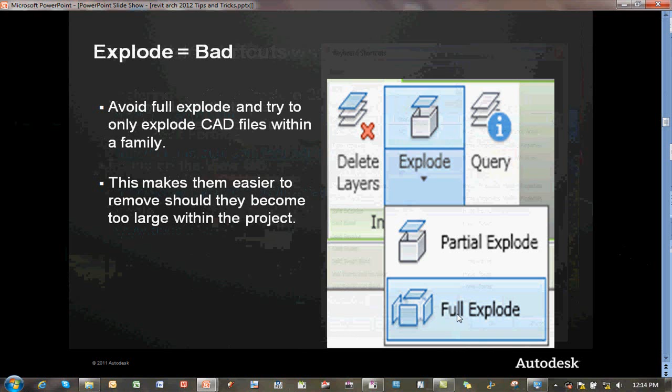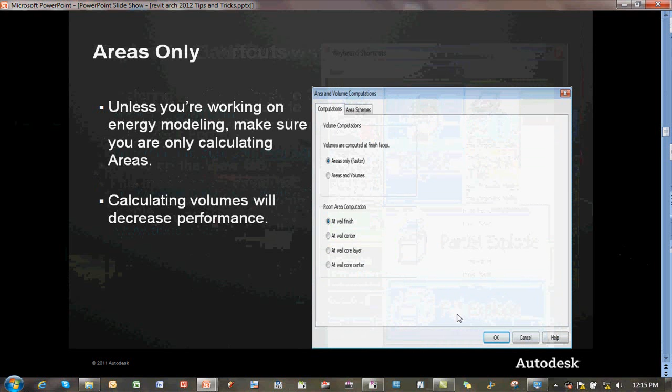Areas only - this is a big one, and a lot of people don't realize it, but there's a setting under the Rooms and Areas tab. I should probably switch over to Revit and show you guys some of these things. In fact, I think I will. Let's just get the basic sample project open here. So I'll switch back and forth between PowerPoint and Revit. I probably should have had it open already - would have saved 30 seconds or so.

Under the Room and Area tab, a lot of people miss this little pull-down. There's actually a little arrow at the bottom of the Room and Area tab, and you'll notice some other tabs, like Build, don't have it, but this one does. There's some more information there, and you can go to Area and Volume Computations. By default, Areas Only is on.

When we start wanting to get into doing any kind of energy analysis and understanding what the volumes are, we check on Areas and Volumes. I wish there was a way in Revit to quickly toggle this on and off project-wide, but this is how you do it for now. When you turn Areas and Volumes on, every move I make where there's a room inside of a Revit model, if I move a wall, it wants to recalculate the area and display it in a schedule, and it also wants to do the volume. So it's adding another calculated value to what Revit has to think about.

So if you're not doing anything with volumes at that time, and you're not ready to go out to GBXML to do energy analysis, go into the area and volume computation area and turn on Areas Only. It actually tells you it's faster. If your drawings seem slow, that's one thing to check. Make sure you're only calculating areas and turn on volumes only when you need them. There are other options here for how you calculate area, but realize these do not affect the volume calculation. The volume is always at the interior surface of the walls, floor, roof, etc.

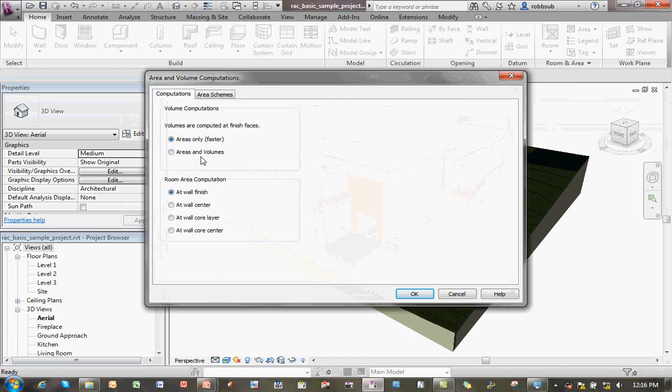Okay, back to PowerPoint. Alright, managing view depth.

I'm probably really guilty of this. Every time you cut a section, dropping a section mark inside of Revit, it wants to go out to the extent of the geometry as indicated by this dashed line. What that's going to do is when I open that view, it's going to show everything from that cut line all the way out, in this case beyond the end of the building. So it's regenerating a lot of geometry. If there's walls and things in the way, like this wall right here, I can't even see any of this furniture beyond, but Revit's having to think about that. It's basically saying, okay, there's a table back there beyond that wall, but I can't see it, so don't display it in the view.

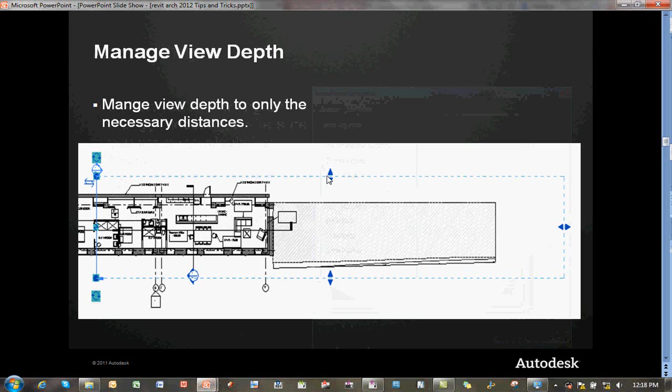So minimize those view depths. If you don't need that section to look all the way through the building, grab the last grip on the end, stretch it back so it makes a more appropriate section cut. And be careful about the sides as well - how far across the building do you want that crop region to be? Managing view depths is a great tip. I tend now to try to make them more or less little slivers. What's important about that section cut? What do we want to see, what do we want to convey in our construction documentation set? Like I said, I'm really guilty of this - I used to stretch them all the way out the building. So just be aware of that.

Purge, just like in AutoCAD. Did you guys have a lisp routine set up for super purge or something at some point? In AutoCAD, if you ran purge once, then ran it again and again, it kept finding stuff over and over. Purge does some similar things inside of Revit.

Basically it gets rid of all the stuff that might be loaded into the project that you're not using. In 2012, it's actually in a different list, but there's a materials purge now too, so you can get rid of all the materials you may not happen to be using at that time. Make sure you regularly purge unused elements. Be aware that you can expand each category - there are little check boxes - but if I just hit purge, check all, and OK, it will get rid of 252 objects right now.

So use this list accordingly. Go through it, expand what you need to see, make sure you set it up the way you want, and only purge out the stuff that you're sure you're not going to use. That helps keep file size small, helps make saves better, helps make save to central better, etc.

Errors and warnings. When I go around and talk to customers, I do a lot of troubleshooting. An office will call me in saying we're having problems with our models, something's not working right, it's slow, kind of the normal stuff. One of the first things I do is go to the errors and warnings dialog box. How many of you notice that little yellow warning dialog box that pops up in the corner of Revit?

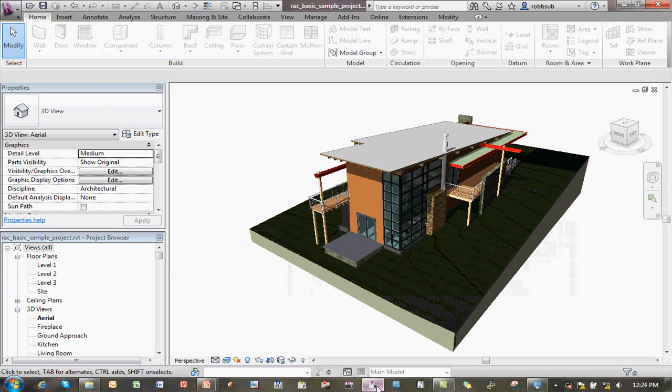And like I said, you can get into a lot more complex stuff. Let's go over to Revit real quick. So this could be anything that has a dimension on it. Oh, there's no dimension—see, this is what happens when you don't use your own Revit file. Let's put some dimensions in it here real quickly. Oops, Home tab. No. See? Now I'm lost. There we go. It takes a while sometimes.

Oh, and it's in metric too.

So any one of these things that we click on, I can simply type equals on a dimension line, put in some dimension, 6,000 minus some other. I'm not going to do it right now because I'll probably blow up this building. But any one of those things, those little dialog boxes, can be a calculated value for you.

Okay? Why do we still use Imperial, by the way? When I go do stuff, I was at the Revit Technology Conference in Australia last year. All my data sets are Imperial. And I was down there, they're going, 256 of an inch? What? Silly Americans. These silly Americans, pretty much, yeah, exactly.

All right, so all of those lines can be a calculator for you. We'll show you some of the more complex formulas you can use later. Those can be things like the cosine of an angle, minus, square root, logarithmic functions. Really anything you want can be typed in those as well. The example in the PowerPoint was actually inside of a dialog box for a dimension.

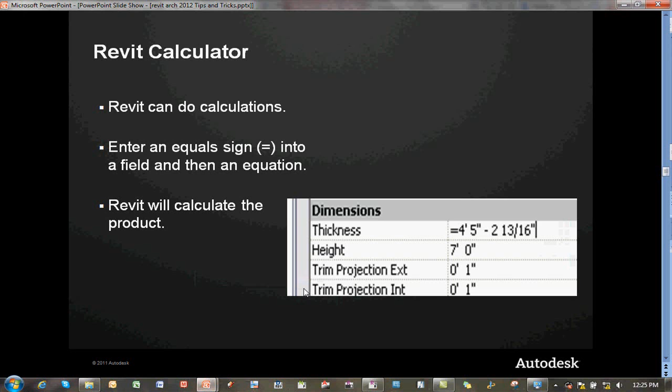2D versus 3D. This is huge. Actually, this is another example I had on my machine, but I'll tell you about it.

People in Revit tend to get enamored by the modeling side of it, right? Oh, that's so cool, I'm going to model every single little crevice of the door jamb, right? And manufacturers are actually really guilty of this, and this is the example I was going to use.

So if you go out to Seek, which is our website for gathering content together, a lot of the content there is getting a lot better, but a lot of it still needs improvement. In fact, we just launched some new things on Seek. Let me see if I can pull that up here real quick. Seek.autodesk.com. Oops. Typing is also not one of my strong points. Should have paid more attention in high school.

Anyway, while that pulls up, there's actually a rating system now on the Seek objects. So if the manufacturer has complied with about 9 or 10 different techniques in Revit, you'll see a little icon. Like, are they including a shared parameter file? That will be there as an icon. Do they have the materials included with the file? So on and so forth. So when you start seeing that rating system, those are generally better families than some of the ones in the past.

So what ends up happening is people start modeling all of this little intricate detail, and the reason I use door frames or window frames is generally we can't see that stuff. Let's take a door frame, for example. If you're going to look at that at an eighth-scale elevation or interior elevation, just the outside lines is fine. I don't need to see all of the aluminum extrusion or the steel extrusion inside of the door frame. This elevator is a good example. So this can actually be drawn as a 2D piece of geometry embedded inside of the family. And when we cut through the elevator, we actually see all of this stuff. But in the Revit model, we might only just see the door as a 3D piece of geometry.

So minimize that. Another one—and I was guilty of this too—is toilets, right? We go, oh, that's a really cool 3D toilet in the library. Actually, it's not. I hate the 3D toilet in the library inside of Revit. I think almost everybody makes their own.

But don't put 3D toilets in all of your rooms, right? If you need to do a rendering of the bathroom—how many people have done renderings of bathrooms? A couple. All right, so then use the 3D toilet in one room.

Otherwise, just use a 2D representation of it. You can make a family that's a plan view, a front view, and side views as one thing, as 2D geometry. So when you place it in your project, you can actually see all of those views. When I look at an interior elevation, there's the front of the toilet. When I look at it in plan, I can dimension to it. If I use 3D geometry, especially because toilets are so curved and they've got the trap below them and all of that good stuff, right?

There's a lot of geometry going on there. So use 2D where appropriate, use 3D where you need to see it. Okay, does that make sense? All right.

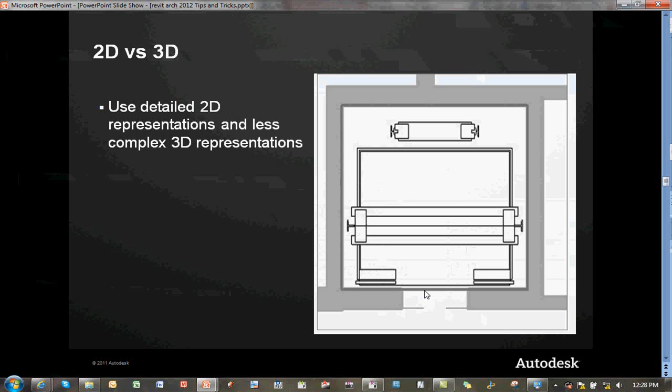How are we doing on time? I got about half an hour.

Graphic overrides. This particular tip is talking about using graphic overrides to quickly indicate poche during design. So one thing we like to do as architects—actually, I think poche as a term isn't even a real word, right? It kind of got invented by architects. Poche in that wall—it used to come from our drafting days, our hand drafting days.

So we still like to use poche to show walls and other objects with kind of a solid look. But if we set that in object styles, it applies to every single view throughout the entire project, right? So just use view-specific graphic overrides. You can actually right-click and say override element in view. Pick something like walls, set the cut pattern to maybe a diagonal hatch pattern or a solid hatch pattern.

And now only that one view is the poche. Maybe that's the one that goes in the schematic design set, and then later on you can have another view that shows more detail of the wall. It's a much faster way to work.

So now, don't be worried about that. Cut a bunch of sections, use what you need in your construction documentation set, make a view that's for schematic design, make another view that's more of your construction documentation view, make another for design development. You can always just delete those views later if you don't need them. They don't really add that much weight to the project—it's just redisplaying geometry that's already there.

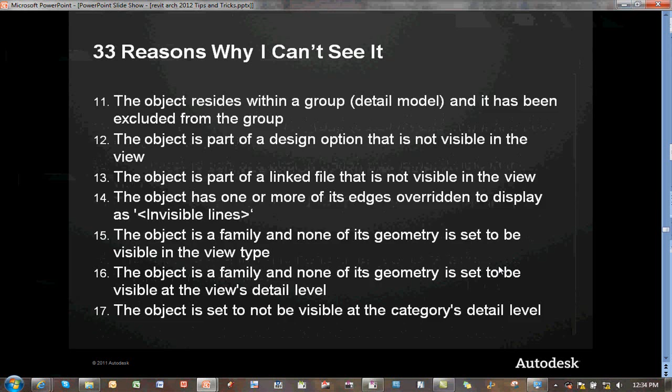17, we're a little over halfway there. Object is set not to be visible at the category's detail level - that's the same thing again. We'll fly through these. Let me see if we can get to a couple others that are important.

Discipline - hey, there's one. So we're talking MEP, structure, and architecture. We get that a lot in the forums: how come I can't see something? I'm in Revit Structure, how come I can't see the walls? Well, because the discipline isn't set to coordination. In the coordination view, a structural engineer can see the architectural walls and the structural walls. That's a question we get quite often.

View filters applied to a view is something else that can affect its visibility. Element overrides set to the background color - there's another good one. So you go and you set an object override to white.

How many people use a black screen in Revit in here? Oh, I see one hand, good. Again, that comes from old AutoCAD days. I have users that, when they first start Revit, set the background color to black and adjust their object style to try to mimic AutoCAD layers - like their walls are red and their dimensions are yellow, trying to mimic the colors from AutoCAD. Don't do that - that's a good tip.

Category override set to the background color. Object style is set to the background color. So realize object styles are global. They affect the entire project.

You've got view-specific overrides that affect the object of that particular type in the view, and then you've got element-level overrides of every view. These are all things users ask for, and Autodesk, the Revit development team gave you, but they're all things that make things more complicated. Users said, we want more control of how everything looks in a view. Okay, we'll do that, but just realize it came with a lot of complexity, so be careful with how you use these things. We're almost done with this part.

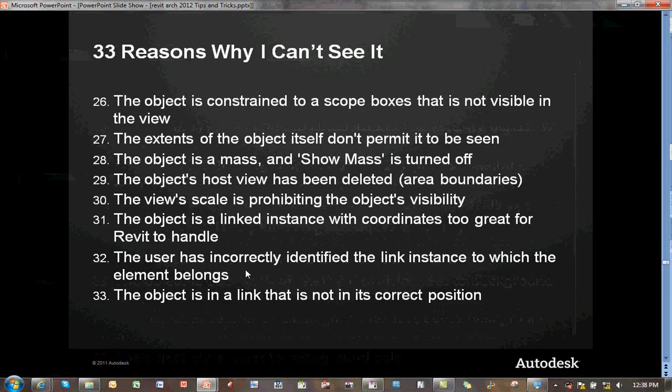This will be something you guys can have as a document to print out. Next time one of your users comes to you and says, I can't see whatever, you can hand them the list and go down, check these off. Any questions on that so far? None? All right, I'm either doing really well or you guys are thoroughly bored. Hopefully the first.

Easy section boxes. Has anybody made a section box view in Revit? A few? They can be a little bit difficult sometimes, so I have a quick set of instructions here to do it, and I'll show you how to do it and what the difficulty is in making one of these section boxes.

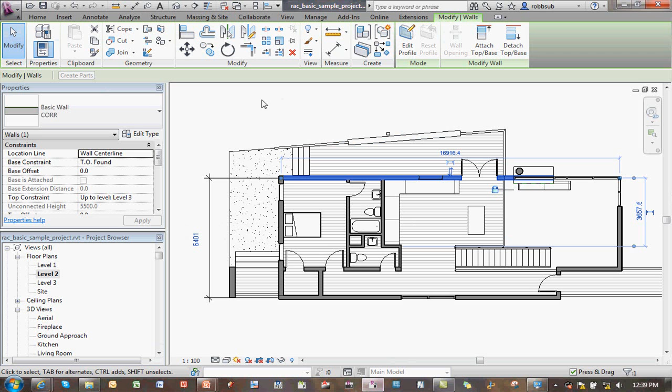So, normal workflow here, even though this isn't my model, we'll try it. Create a camera view. I'm just going to stand outside the building and look this way, and it's going to create this overall view. I'm going to grab the steering wheel.

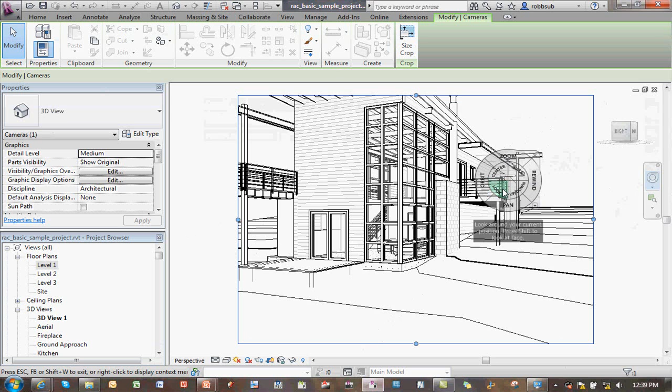How many people like the steering wheel? Like 4? No, it's actually really useful. When I was in practice I used this a lot in presentations because you can start doing things like moving around. A lot of people don't know that when you're using the look tool, you can use the arrow keys at the same time, so you can walk around like a video game, combining those things into one. You have your walk speed turned way down though, huh? Probably, because mine is like, whoo, zoom all the way through the building.

We should add that to the list: you've zoomed past your building in a perspective view.

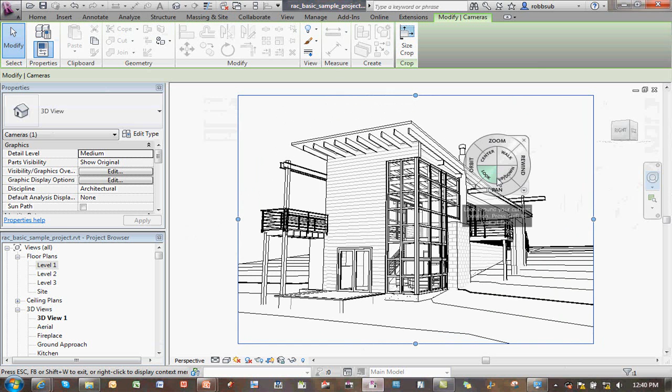All right, so get your view set up. I happen to like using the steering wheel to do that. You can also use a bunch of keyboard shortcuts, like Shift and the middle mouse button, which allows you to orbit and spin around. So there are shortcuts without using the wheel.

Well, then you go over here to Properties, and you turn on your 3D section box because maybe you want to do some kind of cool cut section of this thing. And there it is, and you go, oh, that's cool.

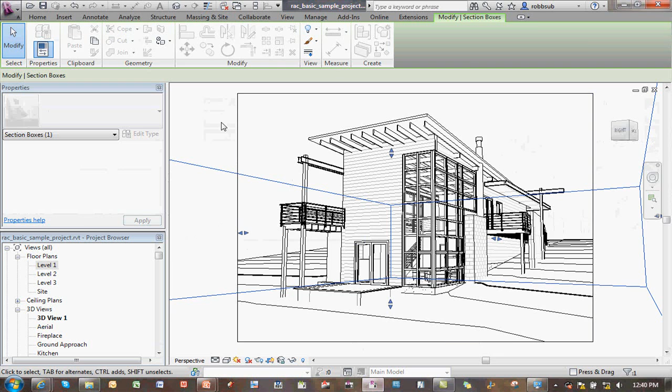Well, I want to pull this thing in front, back, and cut off the front of the building, but I can't get to the section box because, as you can see, it's actually kind of way out here in space. You can zoom way back, and eventually you might get to it and see how kind of crazy distorted it's getting. It's just way out there.

So much easier way to do this. Let's throw a little color in here too, just so we can see it. Keyboard shortcut for color, SD by default. If I use keyboard shortcuts, I try to announce what they are.

Now we're going to use the view cube. How many people like the view cube? All right, a lot more.

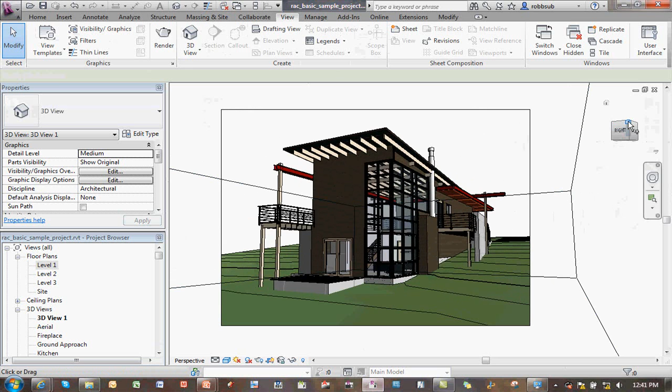Go ahead and toggle that to a view that looks like this. Oh wait, you just screwed up your perspective view. Well, yeah, kind of, but now at least you can get to the section box. Oops, that's the other tricky thing. You have to kind of click right in between the arrows to do section boxes. We'll zoom in a little bit more.

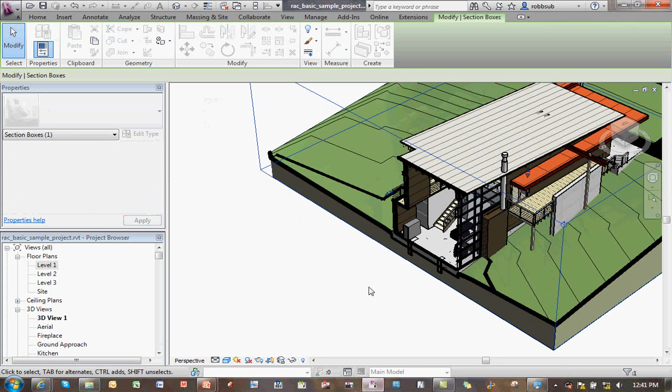Maybe I shouldn't have put color on, it makes the arrows hard to see. So then maybe we want to do our section like that. Maybe we want to pull this one into the side. Use the view cube and go top down, right? And now you can kind of see more or less where you're at. You notice that we're still in a perspective view even though it really doesn't look like it, right?

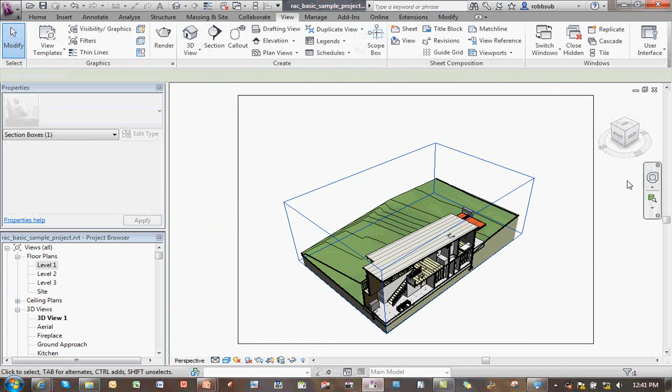Okay, so now, once you get the section box cut the way you want it to, go back to your steering wheel. Yes, you'll enjoy using it at some point. Go to this little guy called the rewind tool. Click rewind and rewind back through the film strip until you get to your original camera view that you wanted. So see how I did all the zooming around. Keep going, and we're almost there, and stop.

All right, so there's the same exact camera I used in the first place with a section box cut the way I wanted it to, looking at what I wanted to look at. So the rewind tool doesn't rewind, it's not an undo, it just takes the view and sets it back to what it was. And as you saw, by using that, I can actually go back to kind of any of the positions all along as I was zooming off into space there.

Now, do not, big tip, go over here and go, okay, I'm done with my section box, let's just go ahead and uncheck it. Right? What happens if I do? Section box disappears, all my edits are gone. Let's go ahead and do it. Told you not to. Apply that, gone, everything's back.

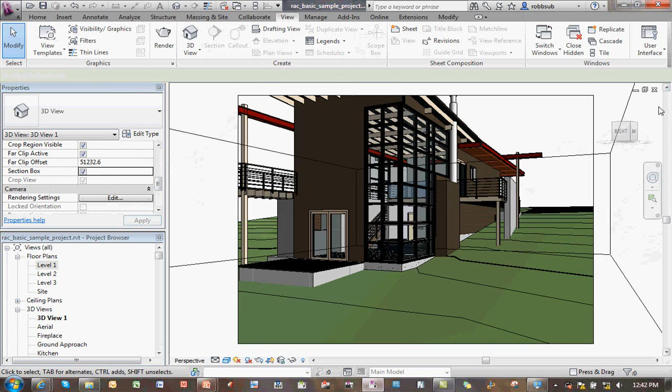Oh, no, that's not what I want to do. Let's turn it back on. Crap. Reset it, go back here, pull everything back in again. I'll try to do it quickly. Something like that, and rewind. You'll notice now my rewind has been reset, right?

It's only a couple things, it's not the whole big thing. So it's not infinitely going to keep a film strip, because can you imagine you did all of the stuff in a view and you had to rewind back for 8 hours worth of work?

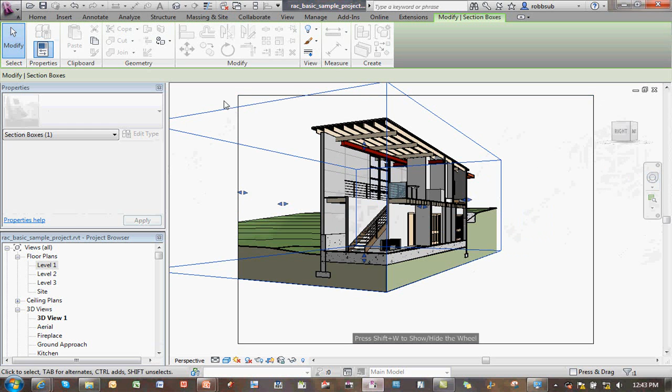So what you do: highlight it, right click, hide in view, element, and now you don't see it anymore. Or use a keyboard shortcut, see if yours is set up, VH is typically view, hide, element, basically hide an element in the view, and it does the same thing.

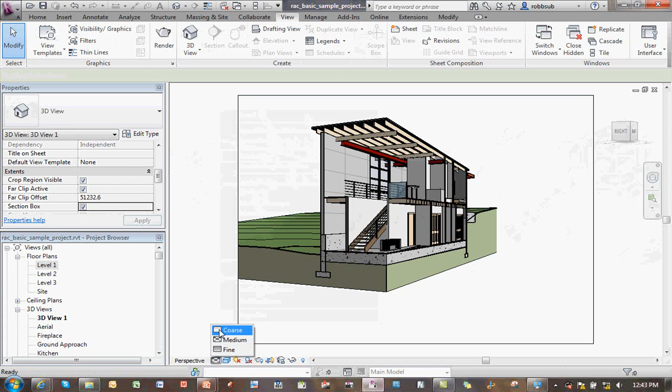So now you've got a 3D section box. Then a lot of people with section boxes ask about the poche that ends up showing up. And notice that I don't have that poche on right now. It's because the poche only shows up in a coarse level of detail. So when I turn it on, you start getting everything that's cut is actually black, and who knows how to change that? Anybody? How do you change it? You raise your hand, I got to put you on the spot.

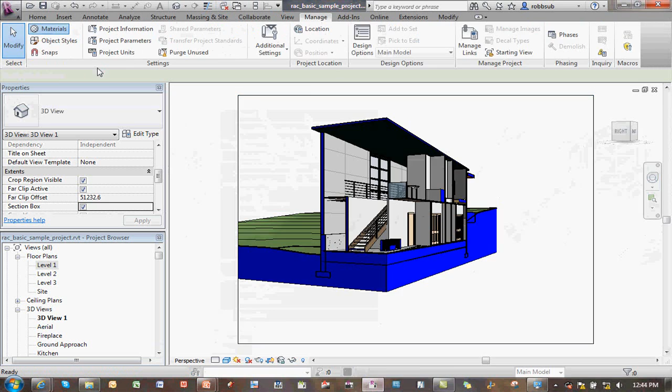You could do it in view overrides. It's also a material. If you go to your materials dialog box, go to Manage, Materials, and go down the list, there's actually a material called poche. Right there, notice it's blue. You can set it to a real material, or just change the color here. Maybe we want our poche to be red, apply that, and now the poche is red instead. Again, it's part of the 33 steps.

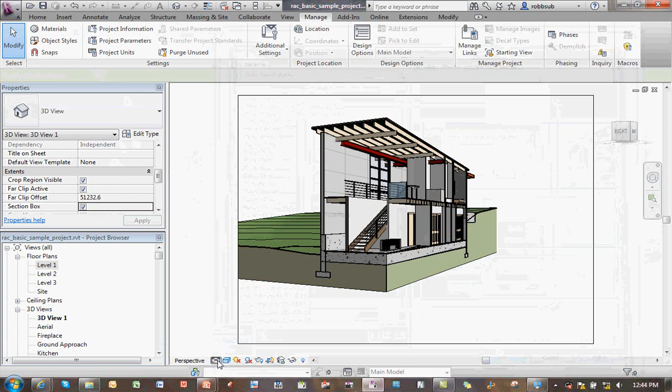What is shown in medium and what is shown in coarse are two different things. So if visibility isn't happening the way you want it to, play around with the coarse, medium, and fine level of detail settings. Can you do that, the coarse poche, in a hidden line view? Yes.

Oh yeah, so you want to talk to your guys? Yes. Talk about being put on the spot. Yeah, it used to show up right here, didn't it?

Huh, yeah. Every once in a while developers do something really cool, and we have all this regression testing. Have you guys heard of a regression farm? I had no idea either until I joined Autodesk, until one of the guys in Waltham, Massachusetts took me into a room loaded with server after server after server. He said, this is the regression farm. I said, okay, what is that? It's actually Revit's code. Do you guys know a new version of Revit is created every hour of every day? That's where your build numbers come from, and your builds have the date and the actual hour in 24-hour time format. Every single hour of every day is a new build of Revit.

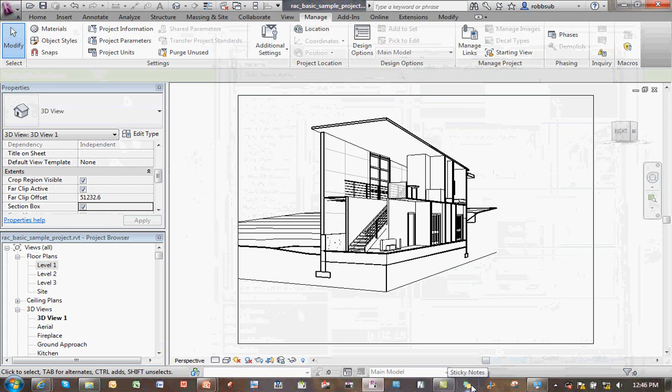All right, let's see here. 15 more minutes, I think we're doing all right. Uh-oh. Let's see, where was I? About right there. I don't know how that happened, I must have hit escape or something, huh? All right, so there's a set of instructions on how to do that.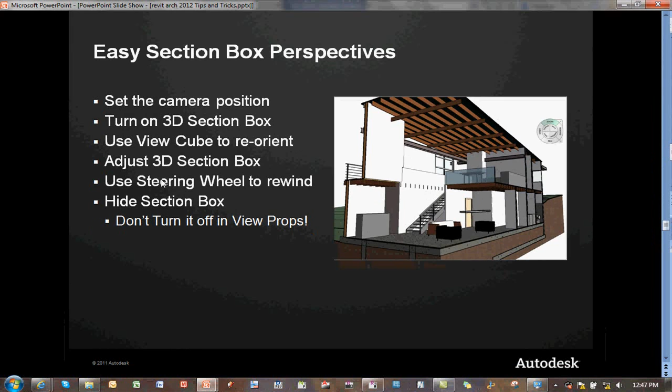All right, normalized curve parameter. Who's heard of this? A couple? No? Anybody done any of the conceptual modeling, any of the massing stuff yet? This is actually a term that comes out of that.

For those used to building loadable families, a door, a window, a light, a piece of furniture, you're used to a certain technique: build a skeleton, a framework of reference planes and reference lines, tie your parameters to those reference lines, flex everything. That's one of our big things, always flex your geometry in the family editor and then hang your geometry on it. Inside of that we've got these cool things for doing equality constraints.

We've all used an equality constraint, I'm sure, inside of a family. It says we always want this door to be centered around this origin point, or something to that effect. So there are certain techniques we use in loadable families that start to change a little bit when we get into the conceptual modeling environment. What I end up finding is a lot of people take that same technique into conceptual modeling, apply those same techniques, and things start falling apart and they don't know why.

I was hoping to explain that and start inspiring you to try some of these new things. This normalized curve parameter is one of the values available under measurement type, which can be set to several different types: non-normalized curve parameter, segment length, normalized segment length, chord length, and angle. Let me show you what these are.

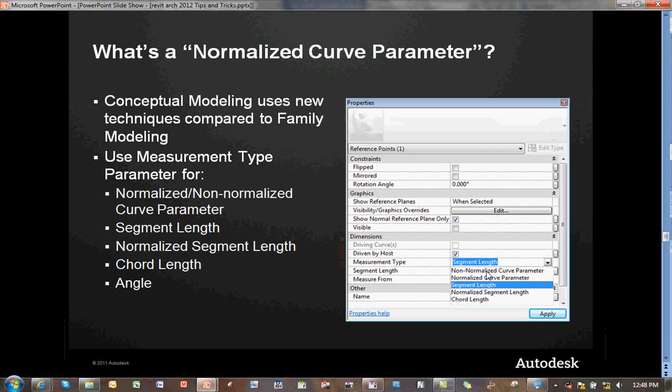Let's go back to Revit. We'll close out of the modern house. It's funny, one of the internal guys, a guy named Greg Demchak, who goes by the name Frame. So when you walk into Waltham, you say, 'Is Frame here?' and Greg comes out. If you call for Greg, he has no idea what you're talking about. He actually made that modern house file some time ago, and it's still something we use. There's actually a design for a real project, a real house he wanted to do at some point. So a little history on that guy.

So we're going to do a new conceptual mass, pick the mass template. For those that haven't gotten into this environment, the first thing you notice is that it looks a little different right away. You're in a 3D environment, with this cool 3D level line. Wish we had those on a project, right? In a normal project environment. Maybe someday we'll get those.

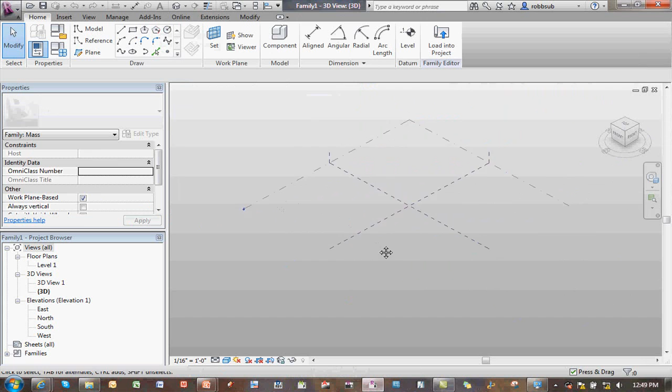You get a couple of reference planes going in here. I'm just going to draw a real simple piece of geometry, just a line, and it doesn't even matter where it goes. The idea with conceptual modeling is that you can host geometry on other parts of geometry. So what we're going to do is use this line to set a constraint, which could be an equality constraint using a point.

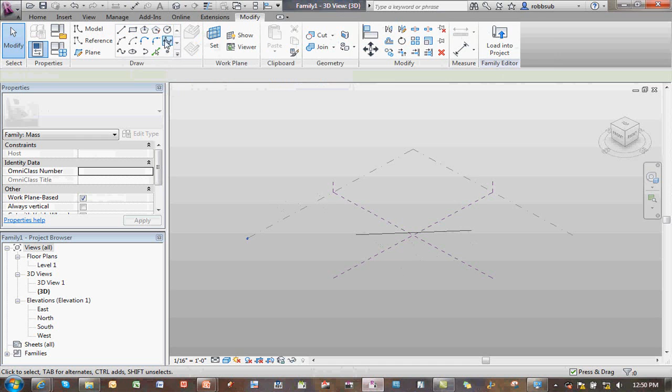It's a relatively new tool available in the conceptual modeling environment. You've got lines and boxes and circles and splines and things, but you also have this other tool called a point. When you come down over your drawing surface and place this point on another piece of geometry, you'll notice it goes from a large dot, and as soon as you hit the geometry, it highlights and becomes a small dot. We'll go ahead and place that right on there. That dot is now hosted on that line automatically.

You can see that if you pick the dot, grab it with your mouse, and move it along, it slides along that rail. So this is about using a different kind of technique inside the massing editor to create geometry that functions as a rail, or a set of controlling geometry that we can do other things with.

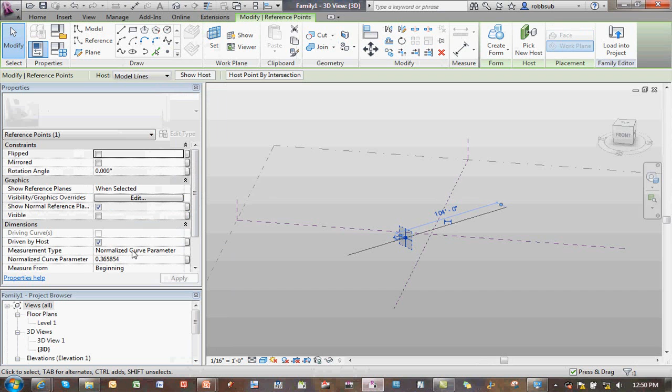So now this parameter called measurement type comes from this point. When I select that one point, let's make the properties dialog box a little bigger so we can see this. You'll notice by default it's called the normalized curve parameter. Now you also have segment length and normalized segment length. So what's the difference between a curve parameter and a segment length parameter?

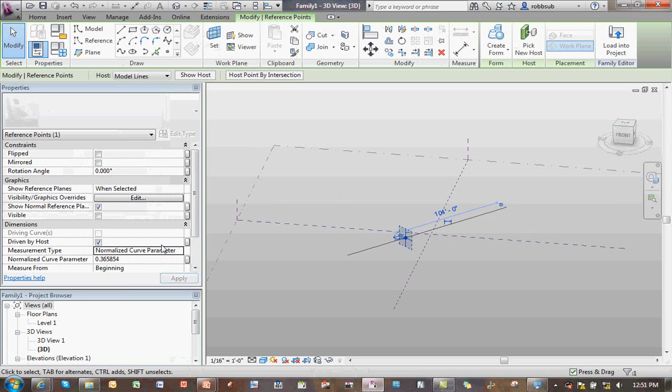Anybody know? They really do the same thing, except a straight line in geometric terms, as far as computer language goes, is actually a curve—it just happens to be straight. A segment is a segment; it has to be straight, it can't be a curve. So that's the difference there. In some cases these can be used interchangeably between normalized curve parameter and normalized segment length. They really do the same thing until you start getting into geometry.

It actually is a true curve, or something that might need to become curved later on, because when you're doing this stuff, you can make a line that appears straight at some times and then actually morphs into a curve using the conceptual modeling tools. So we're going to use normalized segment length.

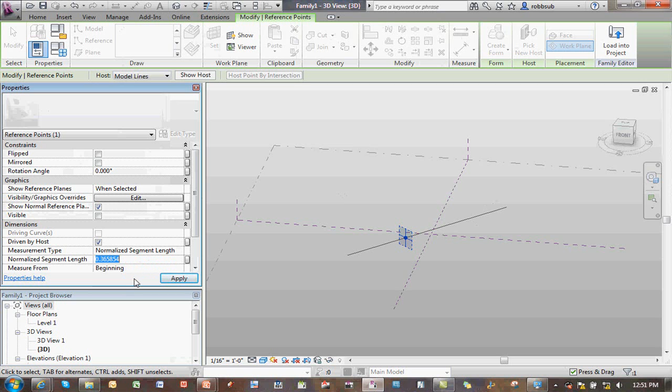Right below that is the normalized segment length value, and right now it's some crazy decimal, 0.365854. In the normal family editor environment, if you wanted this dot to be right in the middle of that line always, most people would go up to the dimension tool, set a work plane, tab into this point, maybe to this point—oops, see, I'm off my work plane. You have to set it over here, or set it to this particular line.

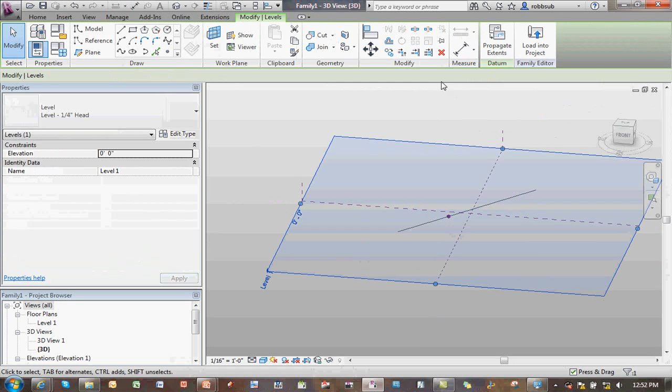Oh, I got to turn that into a reference line.

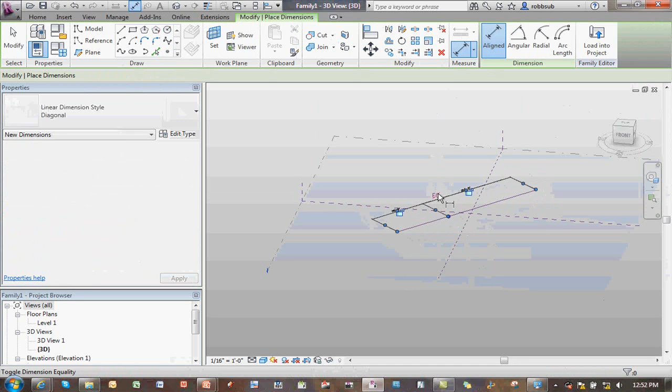Okay, and we'll set our work plane to one of these, and we'll dimension along that now, to endpoint into that dot, and then I might go toggle equality. So now that dot is at the middle of the line, and depending on what I do to this, it will always stay at the middle of that line.

This will start to fall apart. This is kind of a normal technique that if you're used to building normal families, that you'll try, so you try it in the conceptual massing environment. What happens though is if you come in here and tab into this endpoint, if I can get to it again...

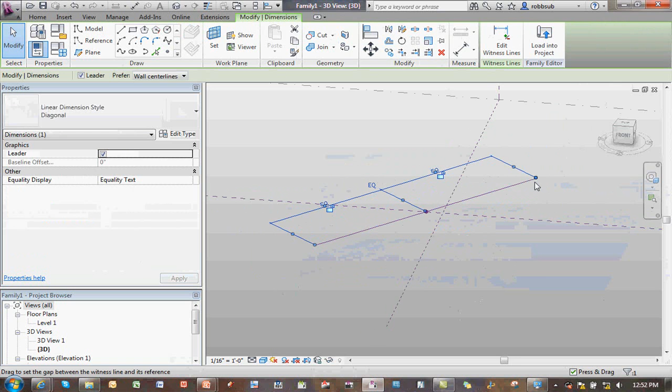If I start changing this thing in a Z direction, which I'm not able to do right now, but sometimes when you create conceptual massing, things start getting out of plane. Dimensions like to be planar, right? They always like to reside on a work plane. What will end up happening is if this thing starts to tweak and get out of plane, especially if you're dealing with curtain wall systems, this equality constraint will fall apart because it won't be able to stay snapped to the endpoints of the lines any longer.

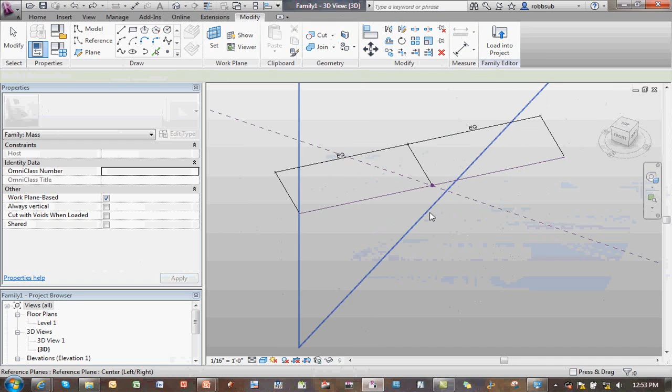So I'm going to undo a couple times. What we do instead in this kind of family is grab that point, go to the normalized segment length, and set this to a value called 0.5. So now it puts that dot directly in the middle of the line, and just like using a dimension, no matter what happens to it, it always stays in the middle of the line. The advantage of using this parameter is it doesn't have to be the midpoint.

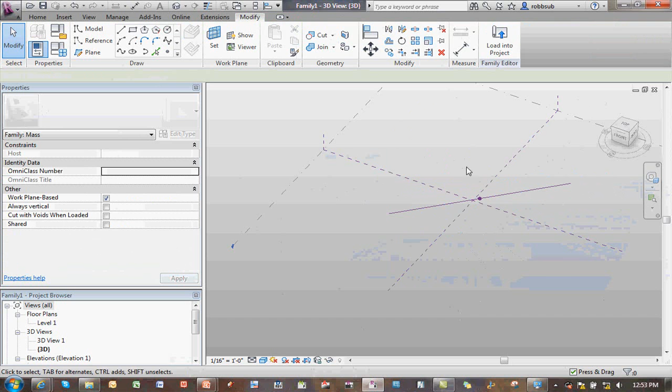What if you want that point to always be a third of the way across the line? Come in here and go 0.33333, apply that, and now that point stays a third of the way across the line at all times. If I wanted another point, we could do another one, and this one could be 0.66667 repeating, so now it's 2/3 of the way across the line. So now those will always stay.

Now I can take those points and I can host other geometry on top of those things, so you can actually build families inside of this conceptual modeling environment and use no dimensional parameters. They're all done by this curve-based parameter instead. Now there's a couple different ones that we can use as well.

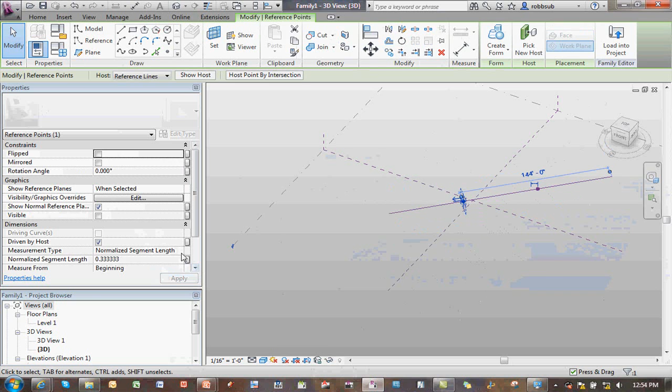What if you want it to always be based upon a very certain length? So we could set that as well. Now that when I set it by length, this parameter value changes the segment length at 72 feet. What if I want it to always be 100 feet? 100 feet from the beginning of the line, apply that, and now it is.

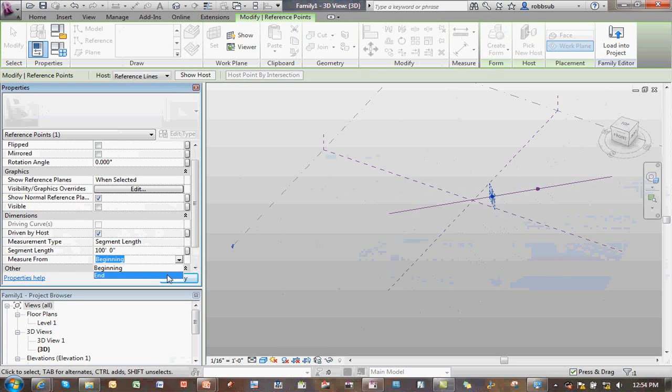Or if I want it from the other direction, it depends on what point you picked first and last to draw the line. You can actually move these things around—it's almost in the middle. So now that point will stay 100 feet from the beginning of the line at all times, no matter how this geometry flexes or moves inside of the project.

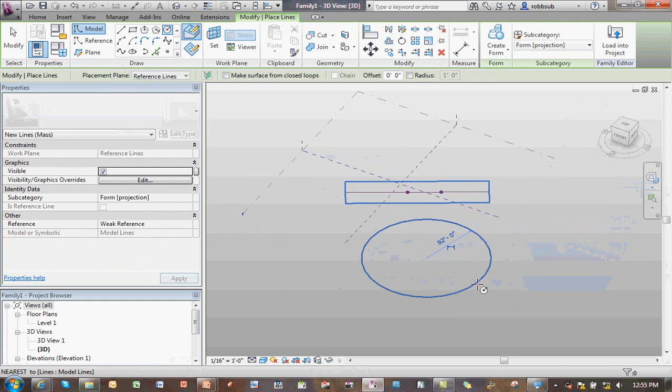There's a couple others that we can use. We start getting into building some more complex geometry, maybe that's based on circles. We can host a point on a circle. Go into the point properties, set that by angle, and we can say that that point always needs to be at the 90-degree portion of the circle.

I could place several more on here, and if I wanted to take the time to go and fix all of them, if I wanted these to be every 60 degrees, then I could draw lines in between them and make a hexagon. And it would always remain a hexagon no matter what happened to the geometry, even if the circle started to tip out of plane.

So just a different technique when you start getting into conceptual modeling. The reason why I thought this was important is because a lot of people are just getting into doing some of this stuff, and if you use the techniques that you're used to now in the family editor for drawing a door or window, they're going to start falling apart in here.

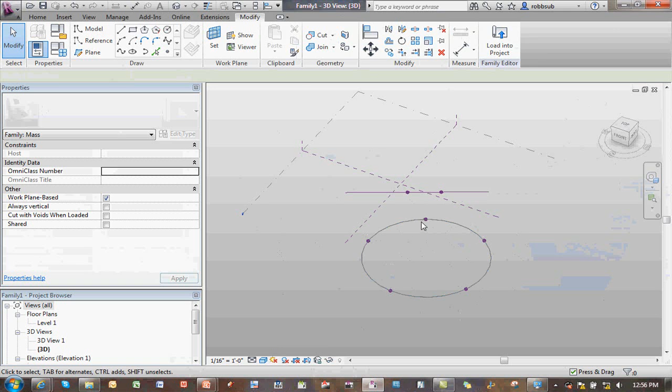It all depends on the start and stop point of where I clicked. I started the point there, and dragged this way, and that was where I did the next one, so it's 90 degrees from that point. So you've got to be very careful with that as well.

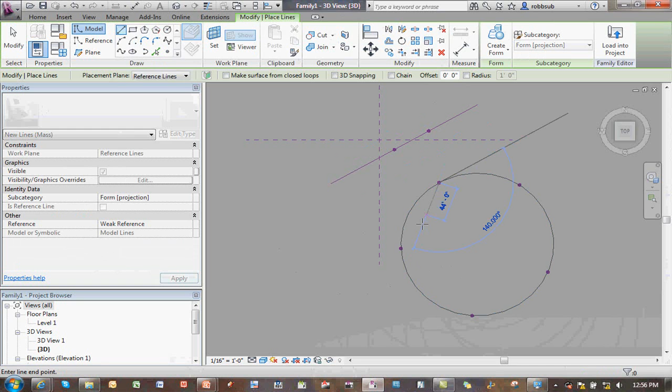Another tip when you get into this environment: most people, if they wanted to connect these two points with a piece of geometry, would pick the line tool and try to snap to this point and this point. See, it's not even letting me snap to the node.

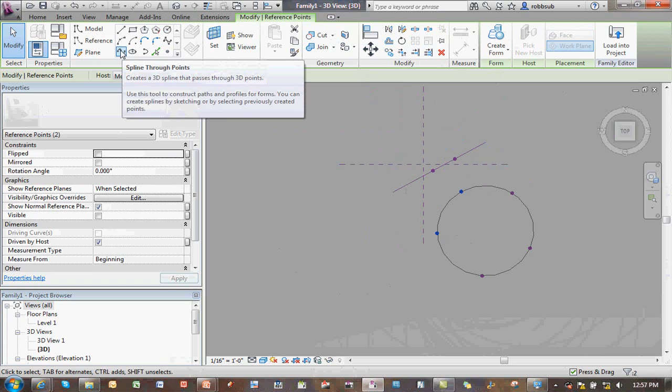The better technique is actually to highlight the two points, and then use this tool called spline through points. So if I pick just two, you might think a spline is a curve - but remember what I said a few minutes ago, the curve and a line are really the same kind of thing. If I pick that, between two points it actually draws a straight line for me.

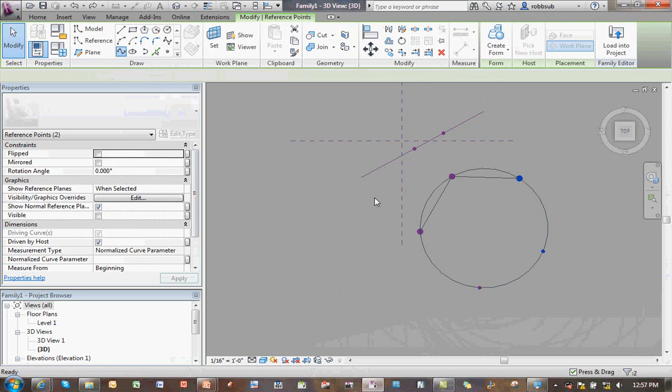So if I continue all the way around this object, doing spline through points two at a time, let me show you the difference. If I go three at a time, now it draws a real spline curve through those points - it wants to actually bend it. If you do two at a time, it makes a straight line segment. So if you want to draw a hex - mine's not a perfect hex because I didn't take the time to set all of these, but I could.

And the coolest thing about these particular objects is that they are parameterizable - is that a word? You can parameterize them. The little equal symbol is here, and I can actually tie that into a value, so I could adjust where that point falls along the circle from within a project. So if I was doing some circular curtain wall or hexagonal curtain wall system, I could change the overall geometry by a parameter, just by changing that value.

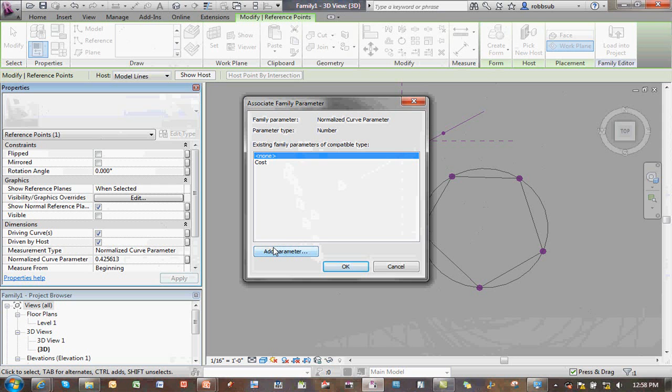And a couple others you have here - you saw we have chord length as well, so that sets the chord length between the points, and non-normalized is an overall value.

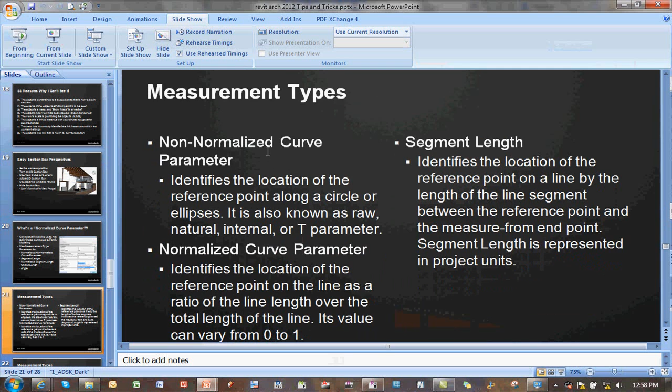In my slide deck that I'll give you - I don't think we should take the time to go over all of these things, and I'm pretty much running out of time. But I explain what each one is, and there's actually the same language in the help documentation - I copied this right out of it. So if you don't know what a non-normalized curve parameter is: it identifies the location of the reference point along a circle or ellipse, also known as a raw, natural, internal, or T parameter, for those who want to get into the geometry stuff.

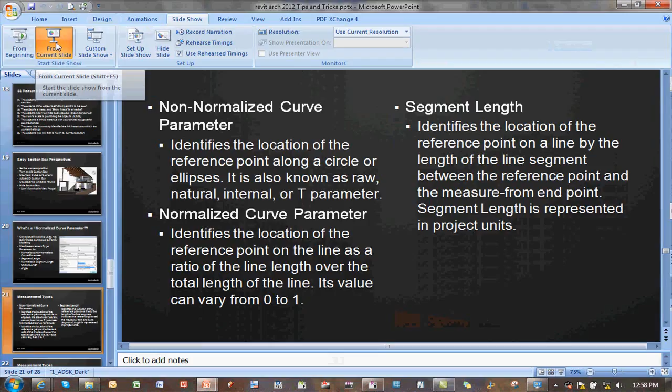All right, a couple more things before we wrap up here. Next: formulas and families - I was hoping to get to this more. As we said earlier, when we type something in at an equal sign, at a dimension, or in a dialog box, there's a whole host of things you can do - all simple arithmetic: addition, subtraction, multiplication.

But what you may not have known is you can raise something to a power, you can do an arc tangent, an arc cosine of an angle. We introduced a round function this year - so if you're looking to do area occupancy calculations and you want Revit to always round up to the next biggest number for occupancy, you can use a round up function now to do that automatically. We used to have to do some tricks for that before, like adding plus one on our own.

Some formulas for everyday uses - actually this is a really great website. I did a screen capture off the web, off the Revit forums, so let's control-click this and go check this website out.

How many people are members of the Revit forums? A few? If you're not, go sign up for this one, as well as AUGI, as well as the Autodesk news groups. Uh-oh, maybe I'm not on the net.

It wouldn't connect? All right, well, when you get the PowerPoint, go click on this link and check this out, or go search for it on your own. It's under the tips and tricks section. This user, Monkom, I'm not sure how you say his name, he's actually from the Netherlands, and he posted, this is about a third of the length of text that he wrote, all about how you could use these different various formulas inside of Revit.

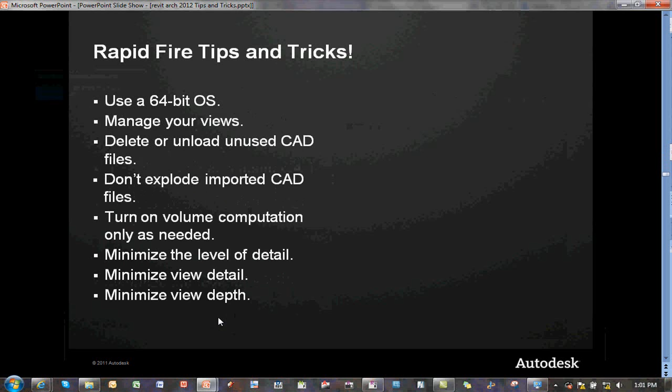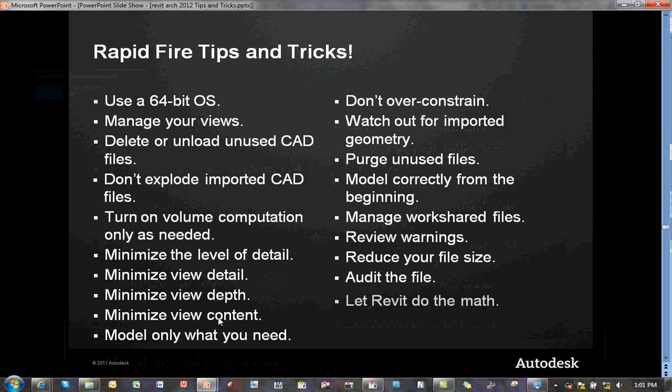Some of these we already saw. Delete or unload your unused CAD files. Don't explode CAD. Turn off the volume computation. Minimize level of detail. Some of these are tips, like I said, that we just saw, but these will all be in the PowerPoint, so you can get this rapid-fire list of things you should be aware of as overall tips and tricks in your Revit projects. There's, I think, 3 pages of these. So let me just back up one.

Don't over-constrain. That's one that gets people a lot. You start adding parameters to everything and locking this value and then locking this value, and then you get that, oh darn it, circular chain of constraints errors pops up on you as well.

And then this one actually comes from Phil Read himself. For very sculptural and organic stairs, there's always the family editor. So he teaches a class every year at AU, or he has in the past, and you can go see that on the AU website and look at his stairs class, and he actually just goes to the family editor and builds some things on his own for doing some really complex stairs.

And to wrap up, 2013 Revit. You guys excited? Getting ready? Prepare to upgrade, right? Anybody on 2011 still? A couple? How come you haven't upgraded yet? Who's on 2010 still? Where's the project? How about AutoCAD R14?

All right, so launch of 2013 for Revit is, drum roll, soon. Got you on that one. Coming soon, right? We're all historians. Everybody can go do a little research on their own. When was Revit released last year? When was it released the year before that? And the year before that? You get a pretty good idea. It's coming just around the corner.